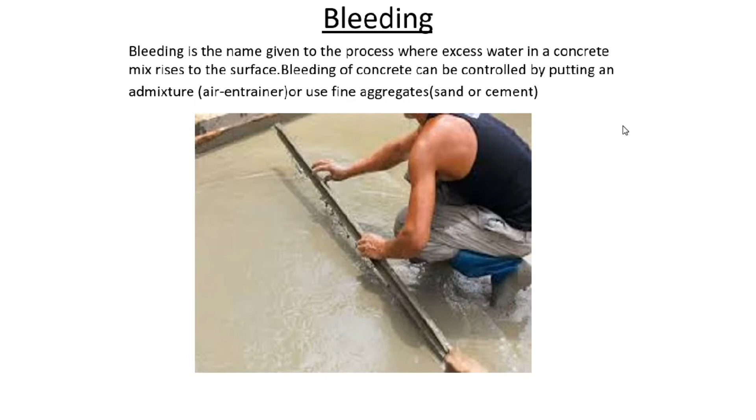Once the concrete is starting to set, we say that concrete is green. If it's still mixable, we say it's still in a plastic stage. But if it's setting, we say that concrete is in a green stage. So how to finish the concrete when it's in a green stage? Once the concrete is setting, it has a tendency to crack because of temperature cracks and plastic shrinkage cracks. So you must be able to finish the concrete so that you close those visible cracks nicely.

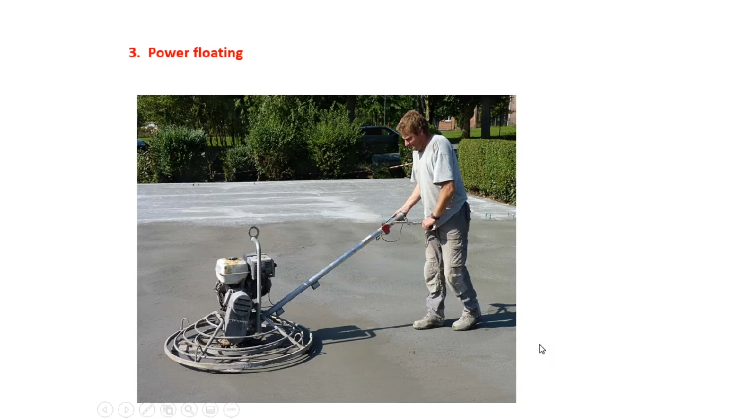The power floating. Here is the example of a power floater. You also power float the concrete while it's in a green stage. It sweeps or closes all the visible cracks while your concrete is still in a green stage.

So once you finish your concrete nicely, now you want your concrete to be cured or to reach maturity, which is your 28th day. How to make your concrete cured? Curing is the process by which it is kept wet or damp so that the hydration process in the outer skin of the concrete can continue unhindered. Curing should start when concrete sets, and the duration will depend on the ambient temperature. If I'm talking about the ambient temperature, I'm talking about the outside temperature.

The benefits of curing hardened concrete are as follows. When you cure your concrete, you want to reach the actual strength, which is your concrete should be rigid. The durability, that is the second benefit, which means the concrete must last longer. If it's like 50 or 100 years, it must last that period.

Water tightness, I'm talking about the permeability. The concrete must not absorb too much water. Hardness, your concrete must be stronger, which means it must be able to withstand any load that it is designed for.

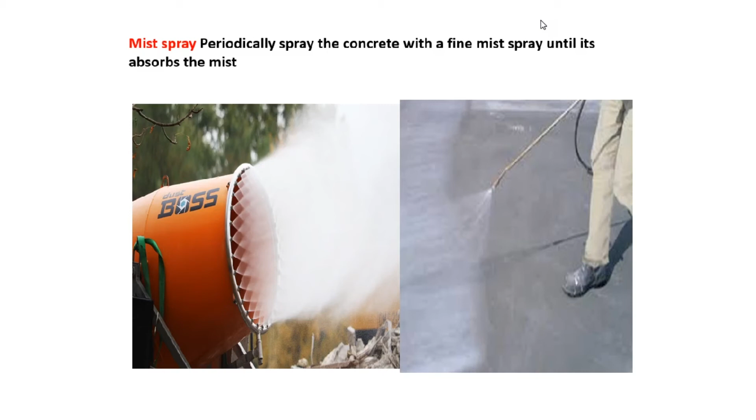Curing compound. You can buy curing compound in 20 liters or 5 liters from the hardware. So what you normally do, you just paint the green concrete. These are liquids that are applied to concrete. When the liquid dries, it forms a thin impervious layer to prevent evaporation. That is your curing compound.

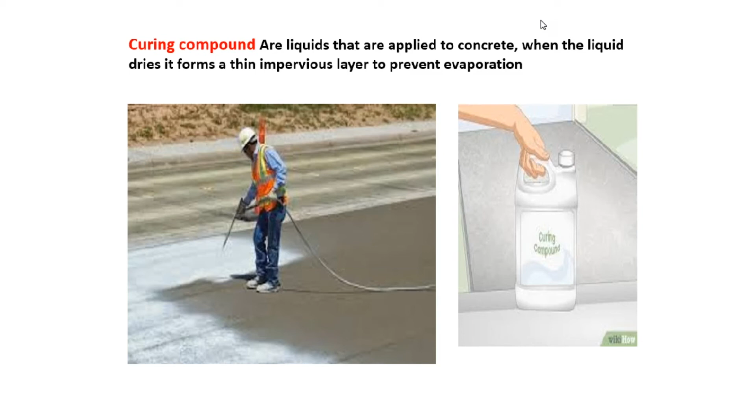The last one. When you want to create like a beam or a concrete column, you always use a formwork. A formwork is when you mold your concrete to a particular shape. So you must keep that formwork for a long period as much as you can. Because if you've got your formwork in place, the water content of the concrete cannot evaporate easily, then this is the most commonly used and approved one.

Leaving formwork in place provides the concrete with an impermeable layer, effectively blocking evaporation from taking place. Because the more the concrete evaporates water, the weaker it becomes in terms of strength.

Now let's summarize what we've discussed in terms of concrete. So we should know the concrete tests. I'm talking about the slump test, the cube test, the correct procedure to place the concrete to avoid segregation, especially of aggregates. Reason for compacting concrete to have good results. Know what is the bleeding of concrete and why we need to bleed it.

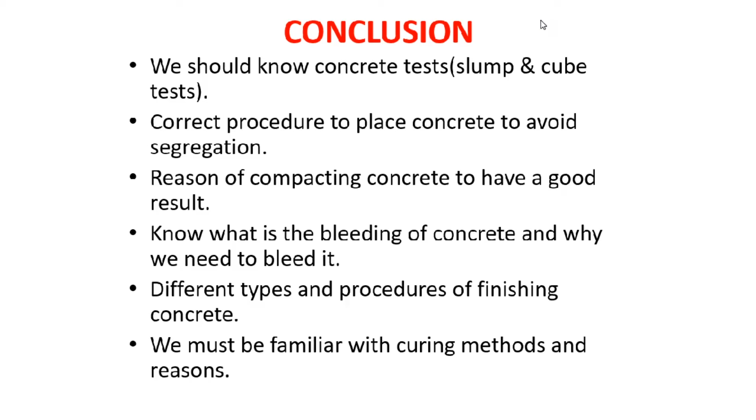Different types and procedures of finishing concrete, which is brushing, floating, power floating, troweling. We must be familiar with different methods of curing concrete and the reasons behind why we're using those curing methods.

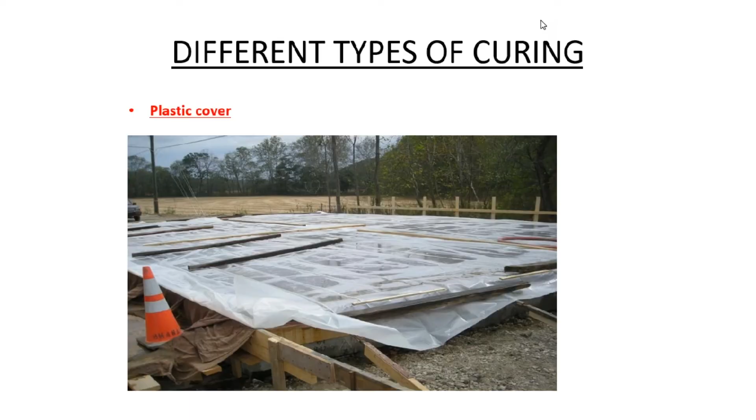In an exam question paper, this is what you can expect. You must be able to list different types of curing methods. And then you must also know how to use them. Like plastic cover, ponding, mist spray, curing compound, keeping formwork in place for a particular period.

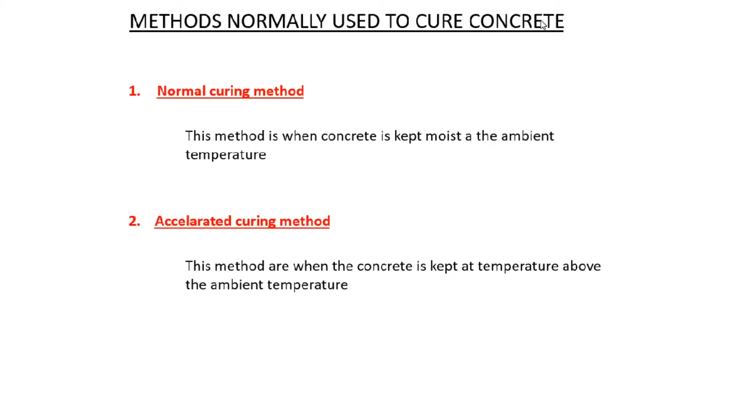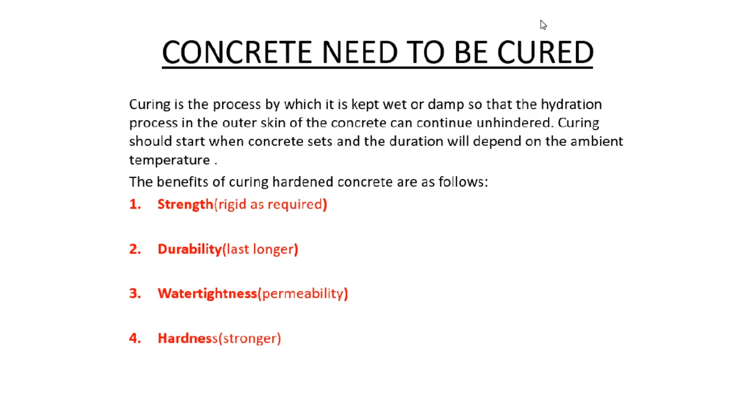And then the second question that you can expect from the examination question paper is why do we need to cure concrete? Reason for curing concrete. So you must know the benefits, of which one is strength. You want to obtain the strength, the durability, the watertightness, and the hardness of the concrete.

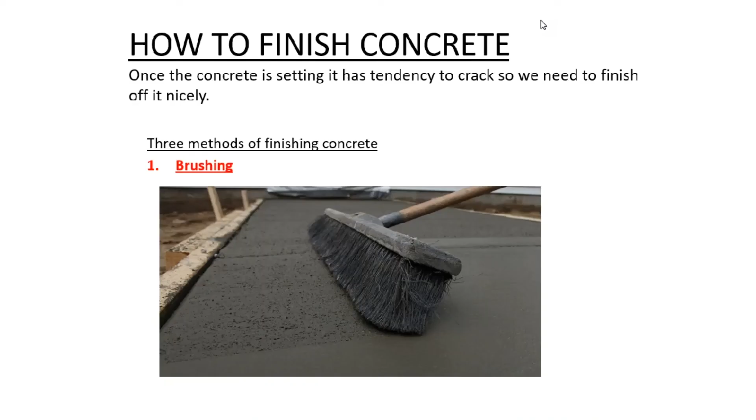You must also expect another question like different types of finishing concrete, which is brushing, hand troweling, steel troweling, or wooden hand troweling, power floating, or power troweling.

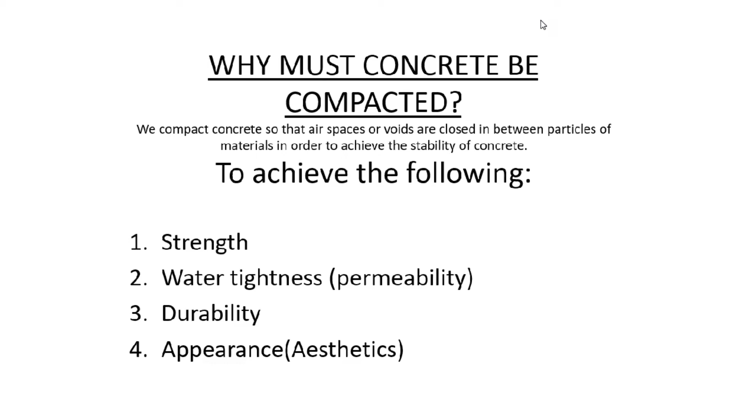Why should concrete be compacted? What exactly do you want to achieve? You want to achieve the strength, watertightness, durability, and appearance. So these two are almost the same, but they are different. Why do we cure concrete? Why do we compact concrete?

If you want to cure the concrete, you want to obtain the strength, watertightness, durability, and hardness. But if you compact concrete, you want to obtain the strength, watertightness, durability, and appearance, which is your aesthetics.

On a question paper, you can expect, like, what results you can get when you are placing your concrete incorrectly. You must be able to give the two reasons that we've discussed. Your concrete will segregate, which means your material, that is your aggregate, will segregate.

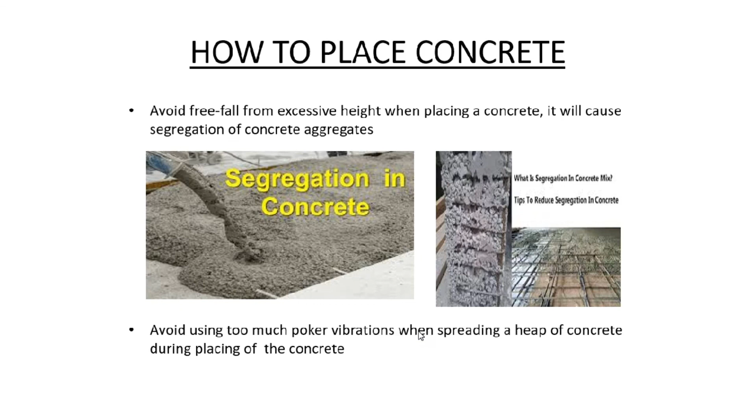And then you must also not use too much poker vibration, because the poker vibrator sometimes pushes your reinforcement or your spacers, because when you are pouring the concrete surface bed or the slab, there are some spacers, and then you must not use too much poker vibrator, especially when there's a heap of concrete during placing of concrete.

Lastly, different types of concrete test. So you must understand what is a slump test, when it's done, why it's done, and how to do it. It's done on site, and when we are about to pour the concrete, we start by doing the slump test, and then you must know the procedure of doing the slump test.

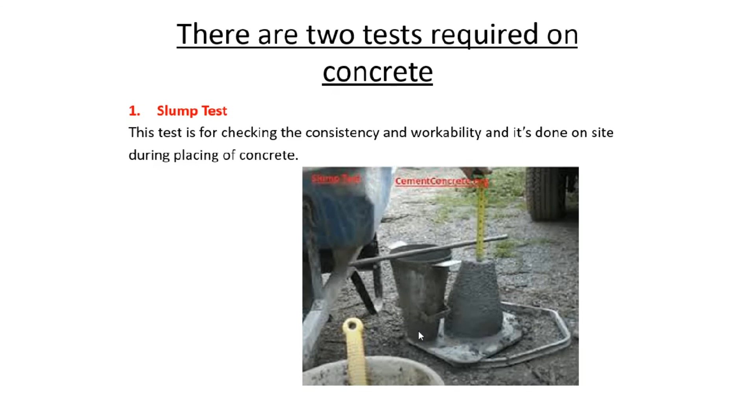Concrete cubes. That is the second test, the concrete cube test. For each and every concrete structure, we're taking 4 samples, which means we've got 4 concrete cubes: the first one is the 7th day, the second one is the 14th day, the third one is the 21st day, and the last one is the 28th day. That's where your concrete structure is reaching maturity, or it's being cured.

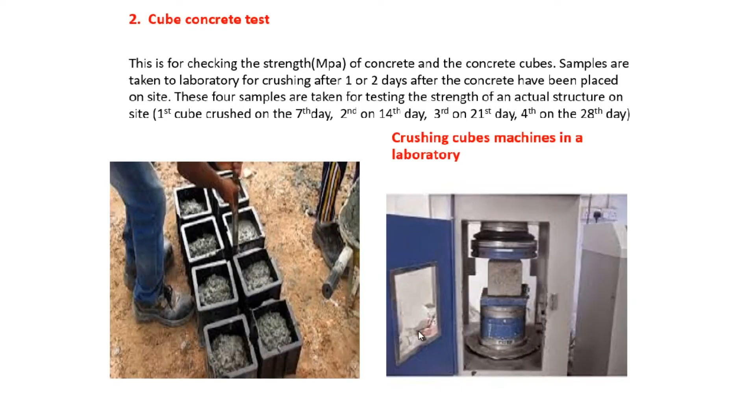That's all that you must expect from the examination question paper in terms of concrete.